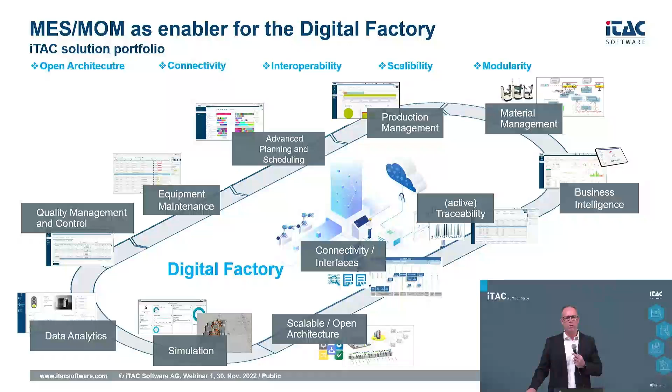Functionally and professionally, we have a wide range of different functions on board in our standard software. We have the modules of APS and simulation on board in our MES/MOM systems. But the idea, the motivation, is how can we focus on production excellence when three sub-disciplines work hand in hand in an operational business together. Let's have a closer look at the next slide.

For the closed loop approach, we need the MES systems with the basic function modules, production management, traceability, and if you need more analysis, business intelligence as well, APS and simulation. Production management provides you with feedback from the shop floor, individual machines and manual workstations back from production. You get the information of KPIs, evaluation. This is the basis for the calculation of the OEE. You receive the feedback in real time. For you, this means that you always know what your KPIs look like.

The traceability module provides you the documented life cycle of a product. Here you can evaluate the process times per order or per unique item. And if you want, the business intelligence modules can support you with further in-depth analysis. The special feature of our business intelligence service from Qlik is that we provide an alert service.

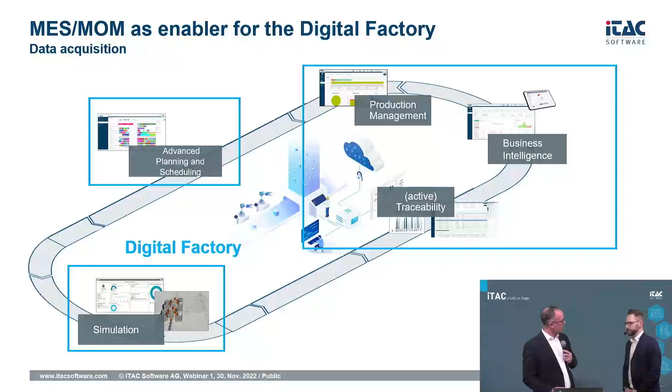Markus, we have the APS, the Advanced Planning and Scheduling service, fully integrated in our MES system. Can you introduce the planning philosophy to the audience?

So the planning philosophy of our APS module is actually based on three main topics, which you can see here. First of all, there is the automated order scheduling against finite capacity. During this automated scheduling, there is also the possibility of an optimization. The optimization is based on 7 target criteria. These criteria are, for example, the optimization of the utilization, the optimization of the on-time delivery, or the reduction of the production, personnel, or setup costs.

The second topic, the so-called multi-resource planning, a very important topic. What does it mean? The APS module is not just able to take into consideration the required machines, stations, or manual work centers. Furthermore, it's also able to take into consideration the required personnel and their skills, required operating resources like tools or transport boxes, and of course the required material for the production order. Doesn't matter if it's purchased material or material which was produced on your own.

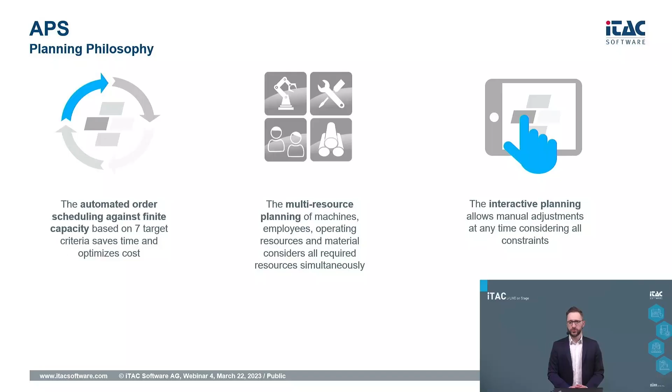The last topic, the interactive planning. Of course, we're also visualizing the planning results on a so-called Gantt chart. On this Gantt chart, the highest possible transparency is the most important thing. And therefore, there are a lot of configurable views and color schemes so that the users of the software, the planners and the schedulers, see very fast the information they need and would like to see. Furthermore, it's always possible to make manual changes in the Gantt chart. Therefore, there is also a menu where you can change the settings regarding the restrictions and rules for the manual planning.

So what are now the specific benefits by using the MES/MOM system together with an integrated APS module? First of all, a global instead of a local optimization will be possible. So what does it mean? So there's not just the optimization of single areas, which for sure can cause some problems in other areas of the production, but with the integrated APS module, the connection with the MES/MOM system, it's possible to have a global optimization through all operations, processes, and levels.

Second benefit, for sure we are receiving the confirmations from the shop floor in real time from the MES/MOM system in the APS module. Therefore, we have the current state in the production in the planning, and the planning is capable of reacting to this current state fully automated.

Furthermore, transparency and synchronization along the complete value added chain. So you really can see the impacts of one area on all the other areas and see very early if there will be a problem and can react to it. For sure, because of the optimization, there's also efficient usage of all required resources possible, and therefore also a very early discovery of possible bottlenecks.

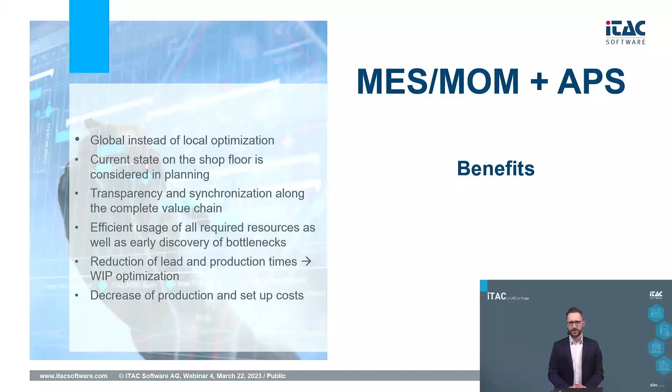So Martin, can you please give the audience an overview of the topic simulation? Yes, thank you.

Yes, simulation is an interesting thing. I explain it a little bit like a computer game. Look, you have many components already there, I would say at least 3,000 components which are already there, and you can put it in the model quite easy with plug and play. You can put on your model, like your shop floor, for example. You put on the rules, the behaviors, and at the end, you put in the orders. Later on, you will see what happens.

You can analyze the system. You can look, where's my bottleneck? You can think about how many people do you need in such a layout? Or, do you need buffers? How big should these buffers be? And so on and so on. You can answer many questions with a simulation tool. And so you have many benefits coming out of this game.

Maybe the most important is to avoid errors. Because you can plan everything in this virtual world. You can test everything. You can try out many scenarios. You can compare different scenarios to find the optimal one for you and for your shop floor. And because we are talking about a 3D simulation, the 3D world is the world we are living in. It is quite easy to understand what will happen there.

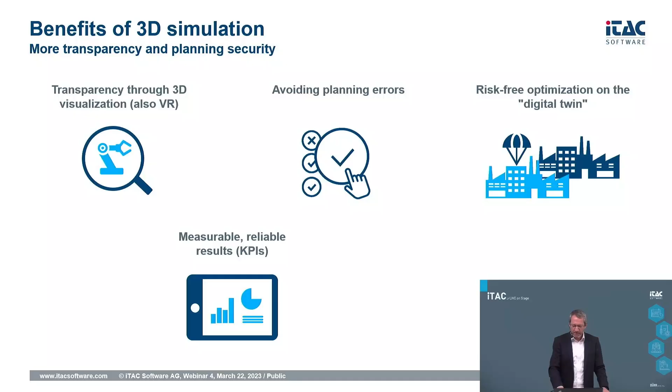I think it is very important that a simulation is not too complicated. If it is such a thing that you need half a year to learn about it, no one will use it. And so we can offer you a simulation which is easy to use and which helps you immediately to find a good solution.

Maybe you do not know, but the simulation is not only a standalone solution. You can combine it with CAD things, with PLCs, and that is exactly what we want to discuss today, with an MES system. We can use the data coming out of the MES system, the orders, everything else we can put in our simulation, and then you will see later what will happen.

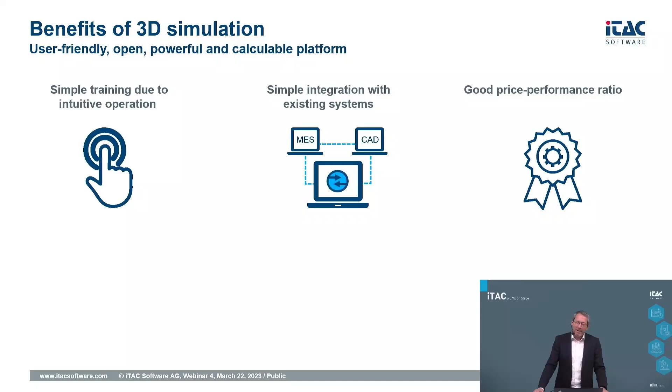Martin, yeah, thanks.

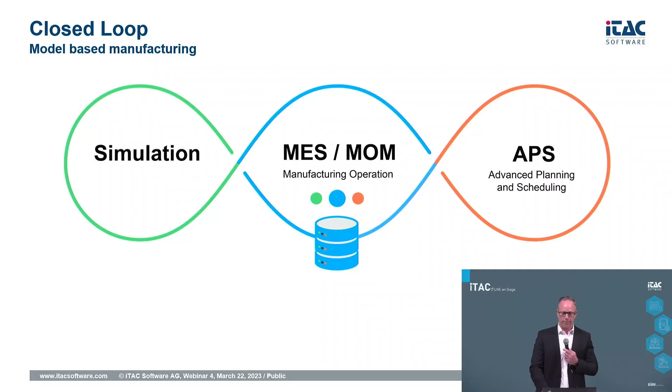Martin, I remember I had some customer discussion about internal logistics in terms of transport control. So the raw material is in the warehouse, and in the material flow from the warehouse to the machine something is wrong, we have a delay. How can the closed loop approach help in this case?

I would say material handling, material flow belongs to the DNA of the simulation. We have in our simulation many conveyors, for example. We have forklift trucks, overhead conveyors, robots, everything else you need for this. And even buffers. You can exactly answer the questions by putting buffers at different sites in your model, and then you can discuss if the buffer is too big, too small, if it is the right place for a buffer. You will see later on it is a very big item, and I would say yes, simulation can help you, even in material handling. That sounds good. Thanks.

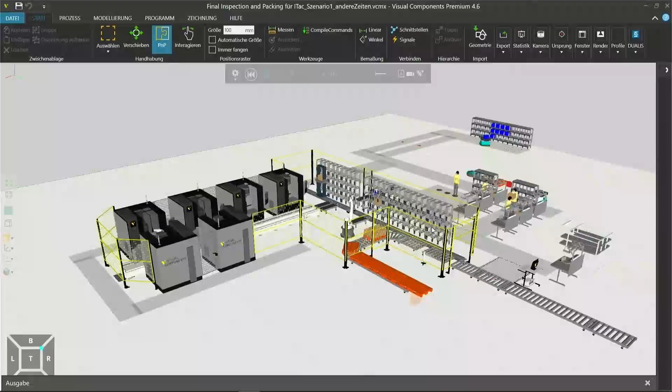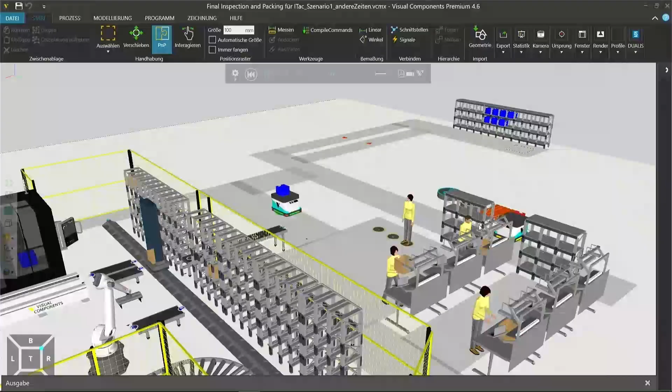We have prepared one case in the brownfield. Something is changing, a new product is coming, and now, Martin, can you introduce the layout? Yes, okay. We prepared a special layout for you, a use case here. Look, we start here with a pre-production. The pre-production is delivering different products. You will find out we have brown products and we have blue products. The brown ones, product number 1, are transported to a manual assembly area. Here people have to do some additional work. The blue boxes are transported directly into a test area.

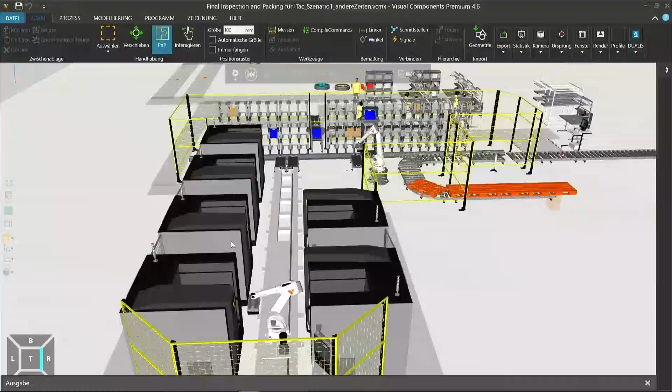Here is the high bay warehouse in front of it, and a robot then puts the blue box into machines. Later on, the box will go to this later high bay warehouse, and you will see there will be a packaging area, and then a dispatch. So that is the use case. We want to look a little bit more in detail. And Markus, I want to ask you how this looks in your system.

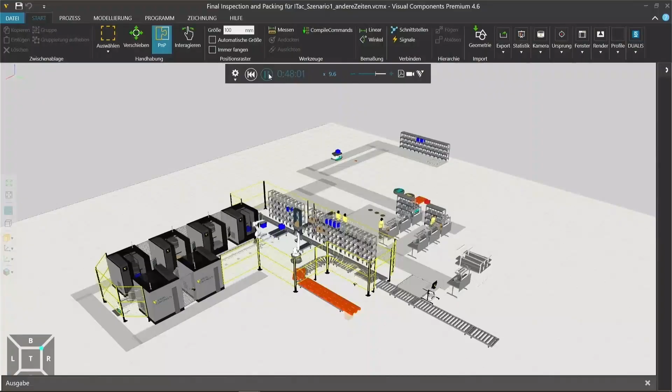First of all, we are in the data area of the APS module. Here we can see all the received master and movement data from the MES.MOM database. Based on this data, we will now start the automated scheduling. Therefore, we go into our planning cockpit and click the start button. Now we can check the result on the Gantt chart.

First of all, we can see here that all of the 14 production orders are scheduled on time or early. So all the production orders can be delivered to the customers on time. To see that fact more in detail, we can change the color scheme to delay traffic light, and now we can see with the green color that all of the 14 production orders are on time.

Let's check the planning model more in detail. On the left hand side you can see the test stations, the 6 test stations which were already shown by my colleague Martin. Then we have our 6 assembly stations and our personnel group with 4 assembly workers.

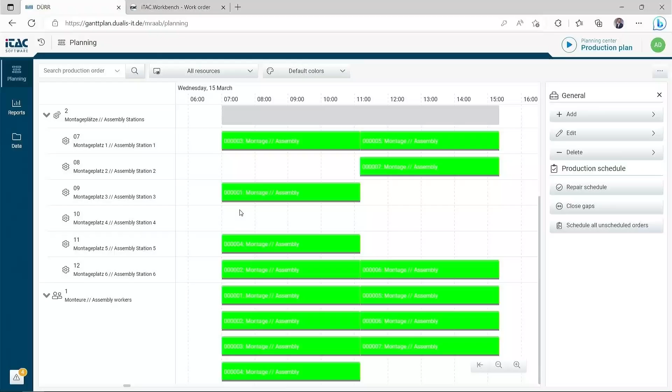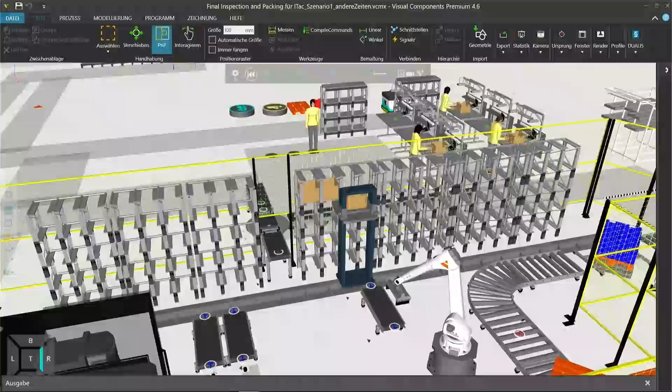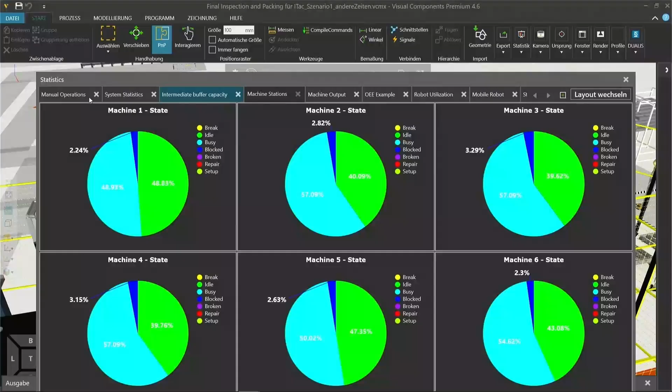Yes, but guys, to be honest, if I look in the system here, that is nearly a little bit boring. Look, people are waiting for new products, new orders. The high-bay warehouse is empty. Nothing happens here. If I look in the statistic figures, for example, maybe we start with the machine stations here. Look, the idle percentage is about 40%. So the machines, they are not doing anything. The manual operators, I would say they have a utilization of 65%. So to be honest, that is not a very good example for a hard optimization, or what do you think?

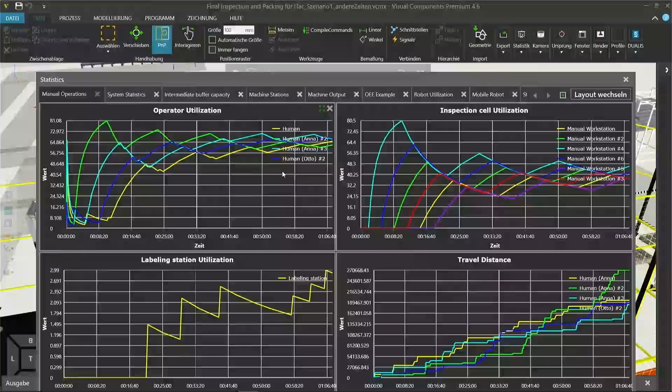Right. I have the information from the management, and we have an additional product. In this case, that is product 3. And Markus, we need a closer look in our APS service. Yeah, and now we have the additional production orders for product 3 here in the APS module. Based on these additional production orders, we are now starting our automated scheduling run again.

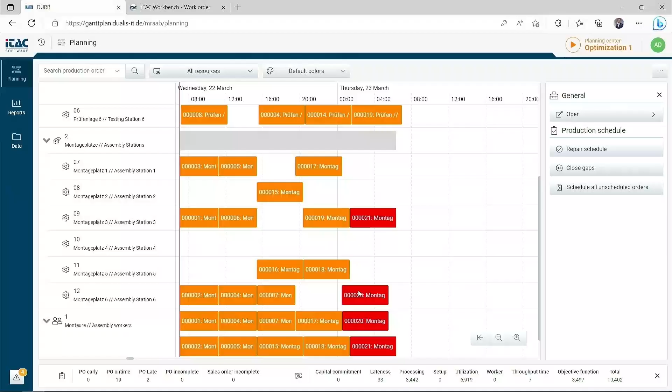Let's check the result on the Gantt chart. Now we can see down here that there is a problem. Right now, with these additional orders, because of the additional product 3, we have now 19 production orders on time. And furthermore, we have 2 delayed production orders. So let's check one of the delayed production orders and see what is the reason for it. Therefore, I'm clicking on a delayed, so a red production order, and open up the so-called scheduling analysis. In the analysis, I can see directly that the problem is a bottleneck in my personnel for the assembly area.

With the information from the analysis, we are now back in the data area of the APS, more precisely in the master data of the worker group. Here we have our assembly team, and we can see we have a maximum capacity of 400%, which means 4 people. So based on the information of the scheduling analysis, we are now increasing this value to 600%, which means 6 people. After this change, we are now starting the automated planning run again.

Let's check the result on the Gantt chart, and as you can see down here, exactly the result we were waiting for. After the measure with 2 more assembly workers, we now have again 21 orders on time. So from my side, everything looks fine. Holger, you can start the production.

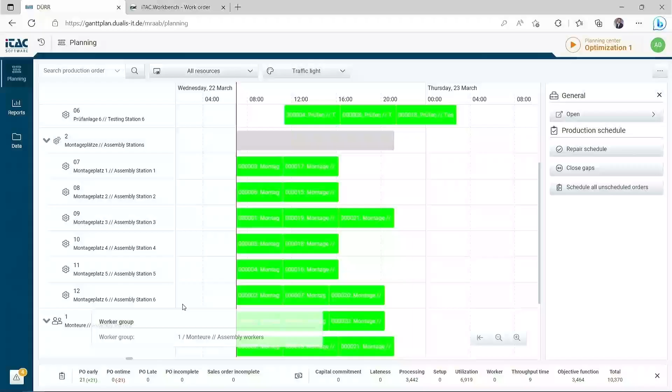Yes, I have the results from the APS service and I can start the production line. So I activate the order. So here on this button, you see it is green. I have the additional information here in this sidebar.

So now when we received all the confirmations from the MES/MOM system in the APS Gantt chart, we can see that there is a problem. First of all, again, we can see with these thin gray bars that all of the operations are completely finished, but all of the operations are additionally red.

To see more in detail the reason for that, we are switching into a utilization report, for example, of testing station number 1. Here we can see the reason for the delay of the production order. Two times we allocate the testing station number 1 more than the available capacity, and for sure that is the reason for the delay.

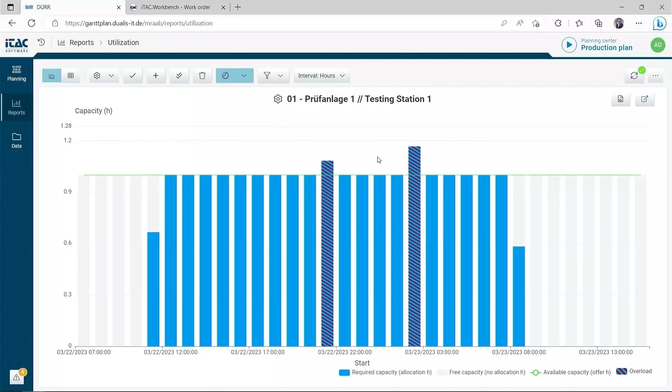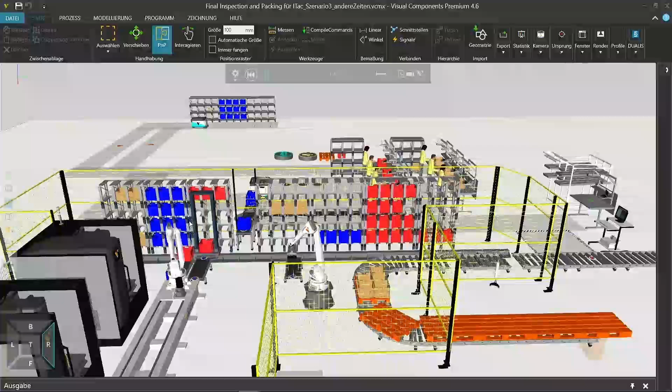Martin, what could be the reason for that? Have you an idea? Yeah, let's have a look in our digital twin here. You see now I have included 6 workers and the new product, the red box here, and the simulation looks completely different. If you look inside the simulation, we see, oh, the buffers. Now we have some boxes inside the buffers. And maybe that could be the reason.

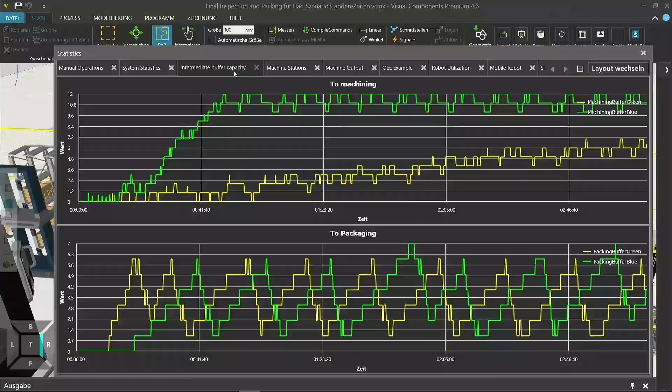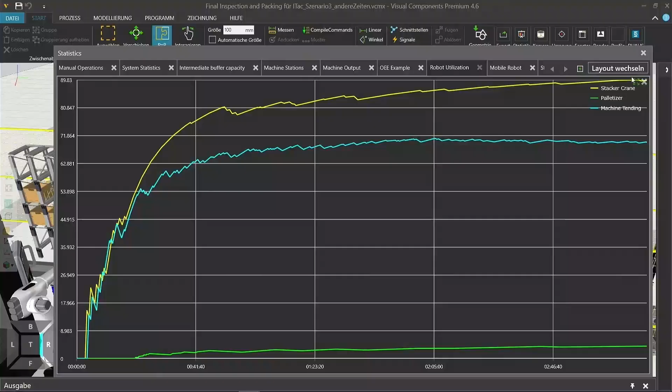If you look in front of the buffer, you will see there's a traffic jam already here in front of the buffer, and that leads us maybe to the real problem. If I look in the statistic figures, and we start with the buffers, then you see the buffers are nearly full now. So even if a buffer is full, you have to look more in detail. If I look in the robot utilization here, I see that the stacker crane, the yellow line here, is increasing nearly to 100%. So I guess the problem in this situation is the stacker crane.

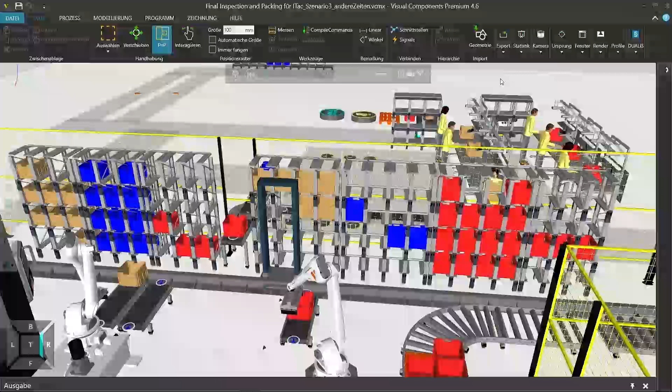Markus, what do you think? Have you seen this in your APS system? Yeah, Martin, waiting times or dynamic waiting times are normally not part of the classical routing in the ERP system. And yes, our planning is based on the routing, and therefore we couldn't see the problem.

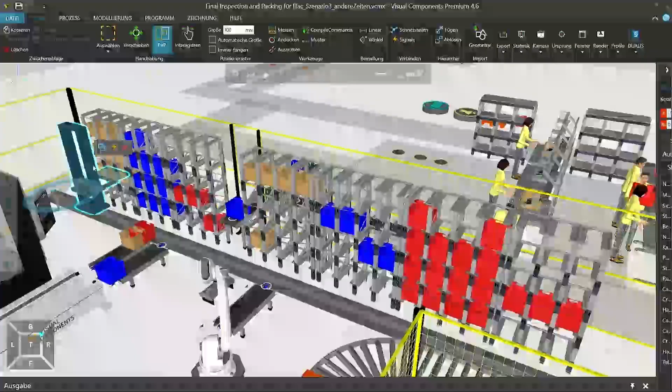Okay, so it is a guess, but we can play around a little bit because we are here in the digital world. I would suggest to put another high-bay stacker crane inside, because I think that could solve the problem. What quite often happens in such systems is that if you have a problem, it looks a little bit like a motorway. You enter a traffic jam, you stand there for half an hour. After a while, you come to the end of the traffic jam and you're wondering because nothing is there, no accident, nothing else. And then you're wondering, hey, what was the problem there?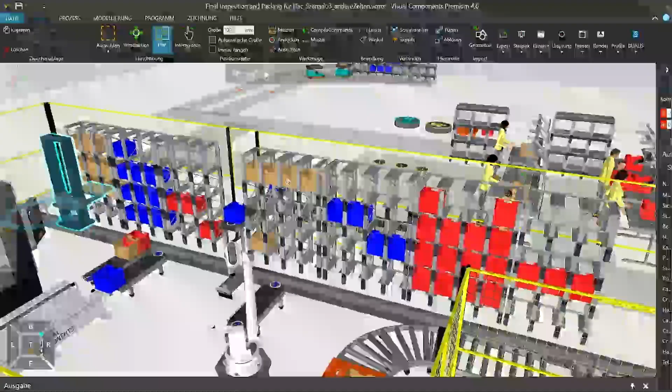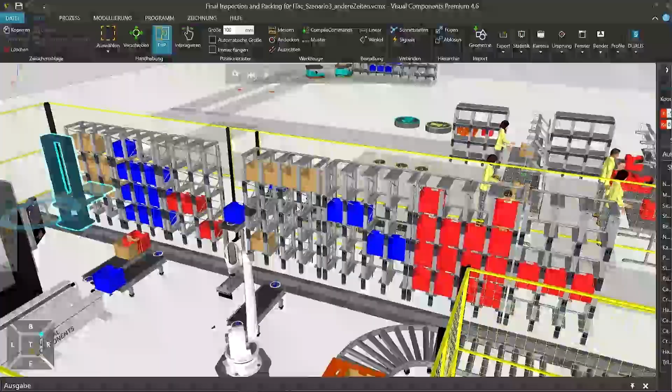And then you figure out that you had a problem on the motorway. A traffic jam starts. After a while, the problem has gone. The first cars are moving out of the traffic jam. But while they are moving out, new cars are entering from behind. And that leads to the traffic jam itself moving over the motorway. That is a very crazy thing. And you can see this in statistic figures when they start to swing. And normally such systems are swinging in many ways.

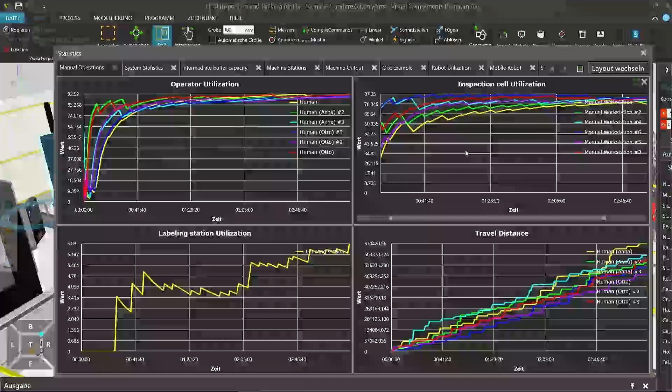And later you will see that the problem you have here with the high-bay warehouse will come to the workers later on, to your pre-production. So I would suggest to put in a second stacker crane. What do you think? Great, Martin. That's what the simulation is for.

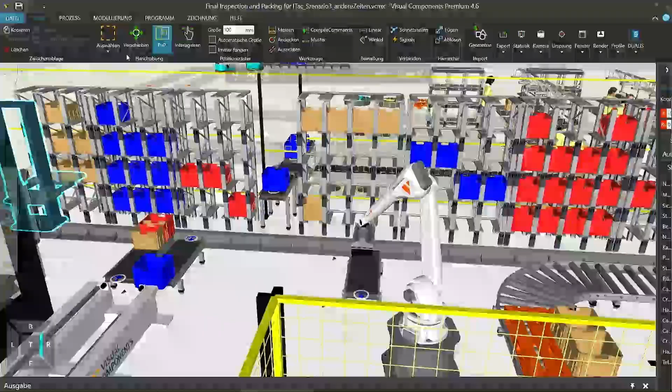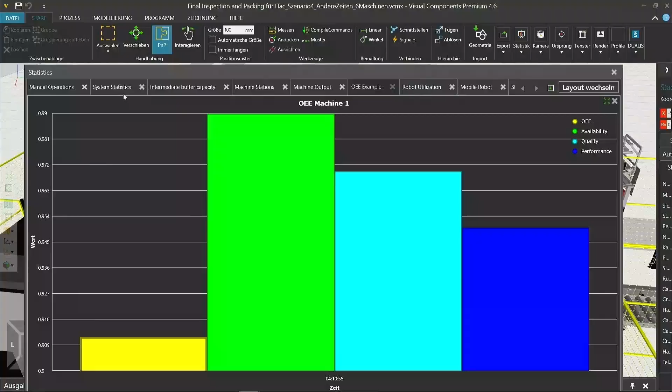Okay, guys. Now we've put in a second stacker crane. And now we see both are moving. The buffer is not as full as it was before. And if we now look in our statistic figures, they are looking quite nice. The OEE, for example, we have here 91%. I think we can increase it a little bit more. Our manual operators are at nearly 90%. But I think that's fine. For me, I would say the system is working.

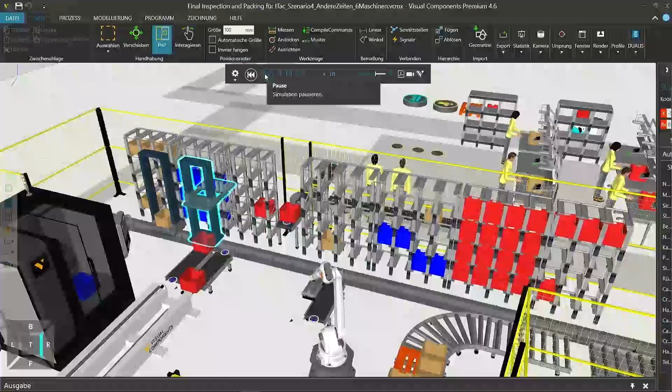Markus, what do you think? If you reduced the time in the buffers by 35%, would that help? So let's check it here in the new routing which we received from the iTAC system. As you can see here, we have now our waiting time in the buffer reduced to 6 minutes and 30 seconds instead of the 10 minutes at the beginning. Based on this new information, we are starting our automated scheduling again and check the result on the Gantt chart.

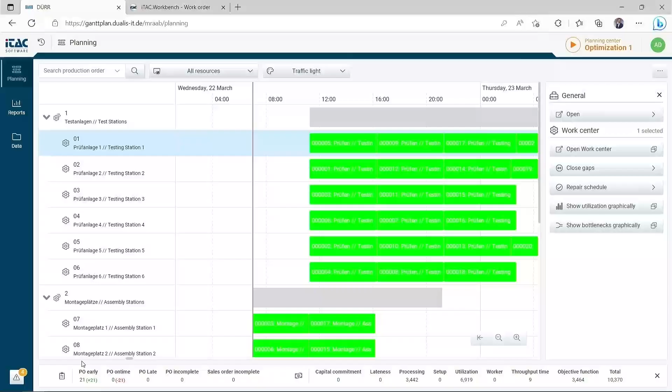And as you can see, all of the 21 production orders are now on time. So it seems the measure with the reduced buffer time really works. From my point of view, Holger, you can start the production. Yeah, okay, the results from the APS service, and I have a fit, so I start the order again to activate the order here. And here's the button to activate the order. The order is starting now, and here you see the sidebar with the additional information.

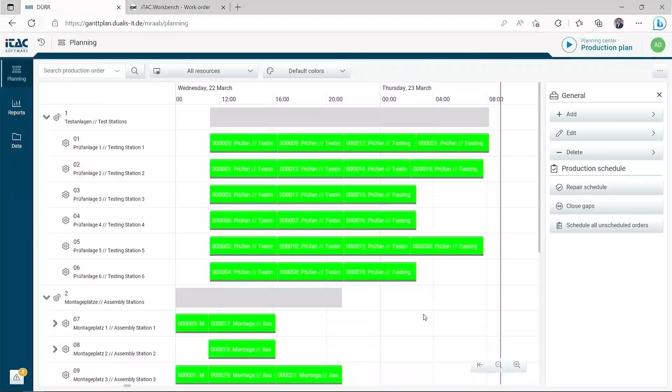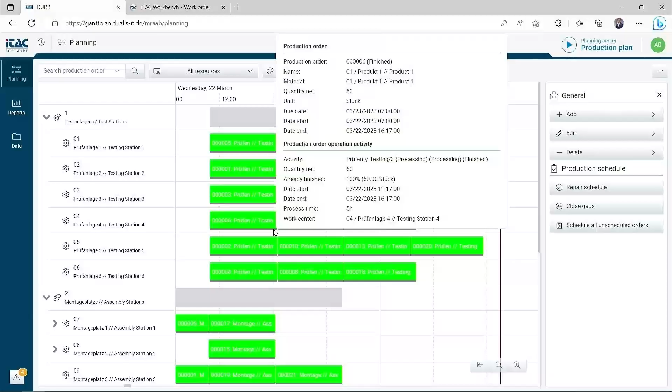So, and now finally we received again all the confirmations from the MES/MOM system. And you can see here again with the gray thin bars that all of the operations are completely finished, but now with a different result. All of the orders are visualized in a green color, which means they are all on time. So the measures which we saw in the simulation really worked. We can now deliver all the products on time to our customers.

A nice example of how simulation can be used with the MES/MOM systems in combination with the APS service. We can simulate and plan on one database. We have a continuous improvement through a digital twin. Martin, you just told of dynamic processes. In the example of the traffic jam, can you explain to the audience what is the added value in this case?

Yes, if you have a dynamic problem, for example, like I showed you in this kind of traffic jam, these jams are moving through your shop floor, gaps are moving in the other direction, you will find out you can't solve this with an Excel sheet. It is nearly impossible. Another example is if you are planning an AGV system, for example. You start with one unit. Yes, you look where are my transports and so on.

You start with one unit, then you put in a second unit. Okay, with a second unit you will have twice the throughput than with one unit. But if you put more and more units in the system, the problem starts. After 10 units, you will feel that one unit has to wait for another vehicle, and at crossings they can't move because they have to wait. And if you then have a big AGV system with 50, 100 units, for example, I would say it is impossible to solve such dynamic processes without a simulation. Yeah, thanks, Martin.

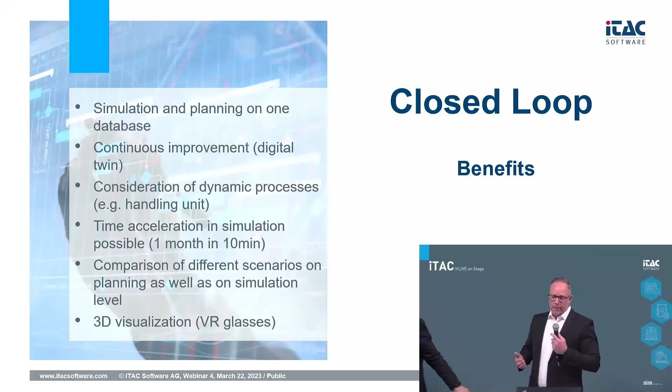Yes, in a simulation you can simulate a month or more, and you save time if you see it in 10 minutes or under 10 minutes, for example. And Martin told us about VR glasses, you can dive into the virtual production and you can see it. And yes, that is how the closed loop approach gets the maximum out of your operations.

Yeah, now the Q&A session. Markus, have you some questions from the audience? Yes, there are already some very interesting questions. So, first question regarding simulation. Martin, can you please? First question is, which use case is simulated more often, greenfield or brownfield?

I would guess it is a 50-50 thing. Both use cases have their own questions, which you can answer very well with simulation. If you're in a greenfield, maybe you have no other chance than to use a simulation because you have nothing else, yes, and you can start to put everything in your model, you can test it, then the simulation is quite a strong tool to answer this question. And in a brownfield, you often have the problem that you can't change your shop floor. And then the digital twin helps you to consider first which is the right solution for you. So both make sense, and I would guess 50-50 is the right answer for this.